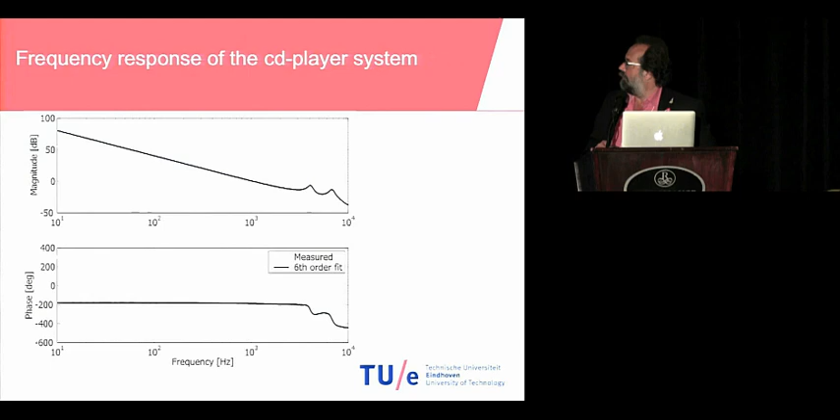Typically this is a frequency response of the radial tracking at that time. So you see a -2 slope, it's a mass, a force, no friction to the fixed world, no stiffness, so a -2 slope, the law of Newton. You see some resonances. So you apply a PID controller with an integral action and maybe some notches. If you apply H infinity, the outcome of the H infinity toolbox will also be a PID-like system with notches, of course.

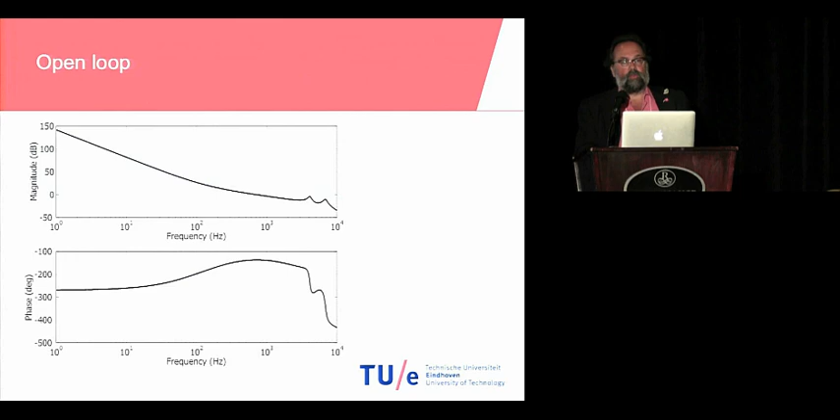Basically what it is, this is the periodic disturbance from the disk being eccentric, being a sort of a potato-shaped spiral on the micron level. You get higher harmonics. So the natural thing to do is to apply repetitive control. Now this was back in 1987 or so, and repetitive control already was invented in the 70s. There was a guy in Philips Research who implemented that in analog electronics.

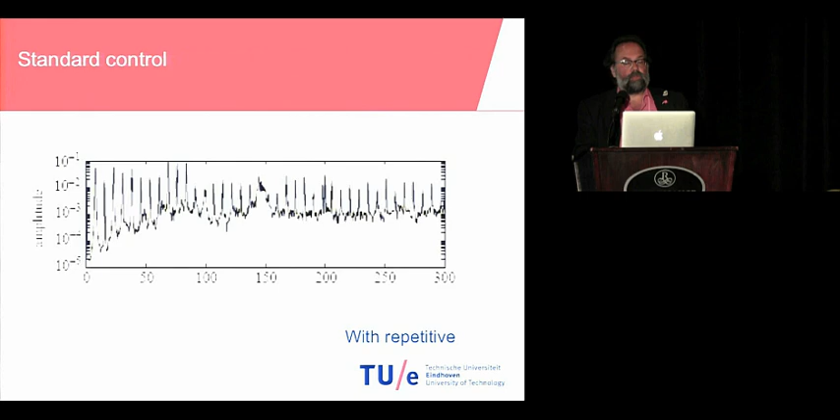What you also might see, but it's difficult to see, is that in between the periodic components you amplify, in fact, and that's the water-bed effect of Bode. Now in the frequency domain, this is the result. The bottom plot is including the repetitive controller. You get it almost for free, this performance. It leads to a much lower error.

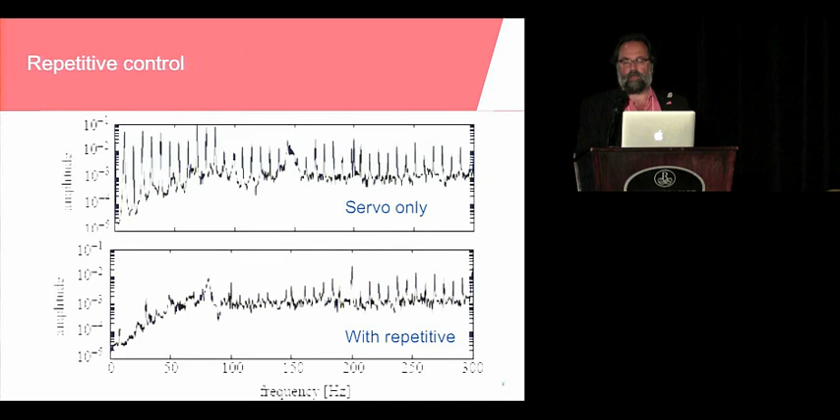The ball game I experienced, the ball game is all about Bode sensitivity. So I like this plot very much, the link to Gunter Stein's Bode lecture a long time ago. This is the ball game of servo engineers. You scrap away, you get performance at low frequencies, but you have to put the dirt somewhere and it's going to hit you.

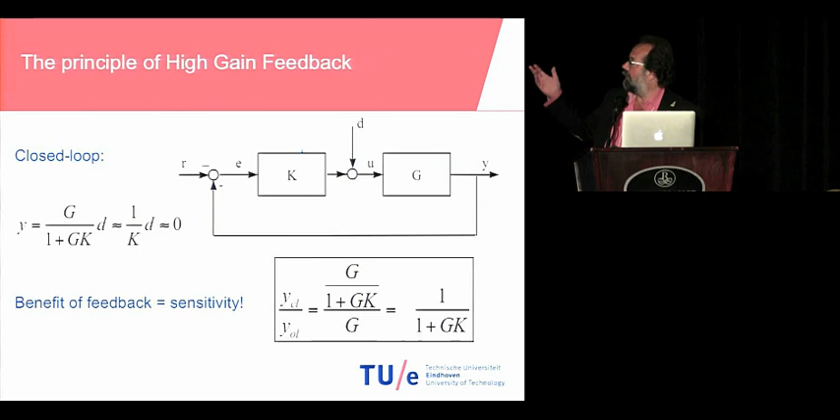The basic idea of our profession is high gain feedback. And I like to stress always this simple idea of high gain feedback. If you have a disturbance on a plant G, the open loop response is simply G times D. The closed loop response, from D to Y, is the process sensitivity G over 1 plus GK for SISO. And if the gain is high, K goes to infinite, then Y is going to 0.

And the benefit of feedback is the ratio between the closed loop behavior and the open loop behavior. So that's the process sensitivity divided by G, which is the sensitivity function again. So the sensitivity function is the key function for performance, as well as, by the way, for stability, because the peak value is the shortest distance to the -1 point. So the key thing of feedback is the sensitivity, but this is the problem of the sensitivity, right? You take dirt away somewhere, but you have to put it elsewhere.

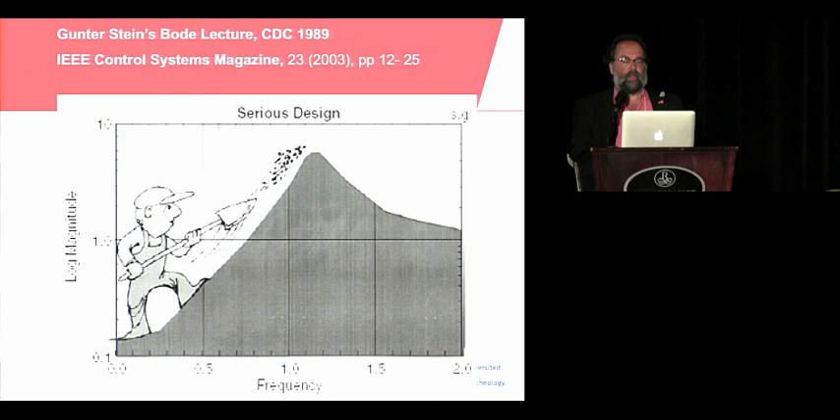So what we did at Philips Research at that time was to make a design cycle where you really use the knowledge of your disturbances into your design and loop shape of your controller. We were able to do the following in 7 minutes: measure a frequency response, fit a model, make new weighting functions based on the error spectra of the previous cycle, do mu synthesis, model reduction, implement, measure again, look at the error spectra, and do the cycle again.

This is one of the benefits of motion control. Experimentation is so cheap. You have a 10 kilohertz sampling rate normally, so in 1 second you have 10,000 data points. So this is great. And then you can really squeeze out Bode sensitivity. You can really make the spectrum of your error white. Because it's white, you can stop.

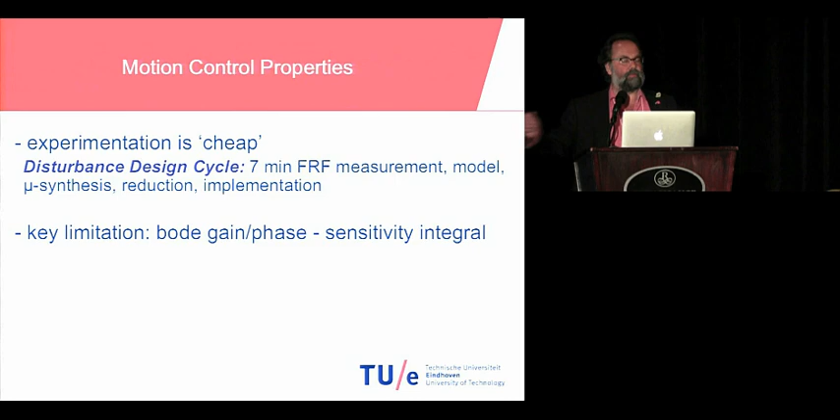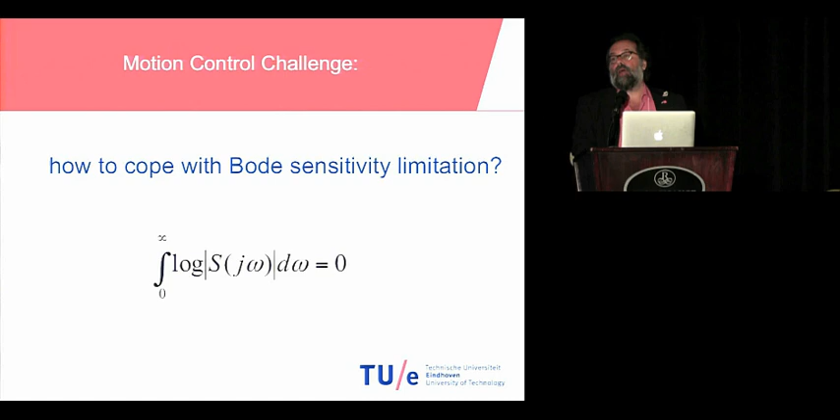So this was the thing I was working on every day: how to cope with Bode sensitivity, in fact how to circumvent it if possible. I will come back to that later on. Modern machinery can help, but it does not solve this limitation of performance.

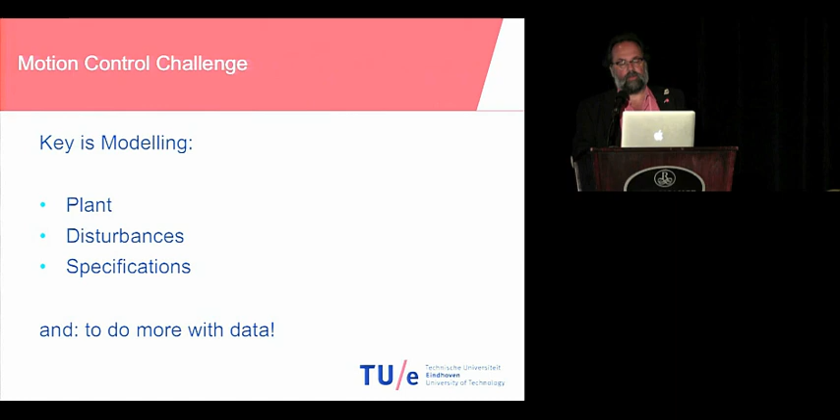So the key things I learned from my time at Philips: plant modeling, fine, everybody is focused on plant modeling, but disturbance modeling and specification modeling is as important as the other part. And do more with data, make a sort of data-based way of doing research and solutions.

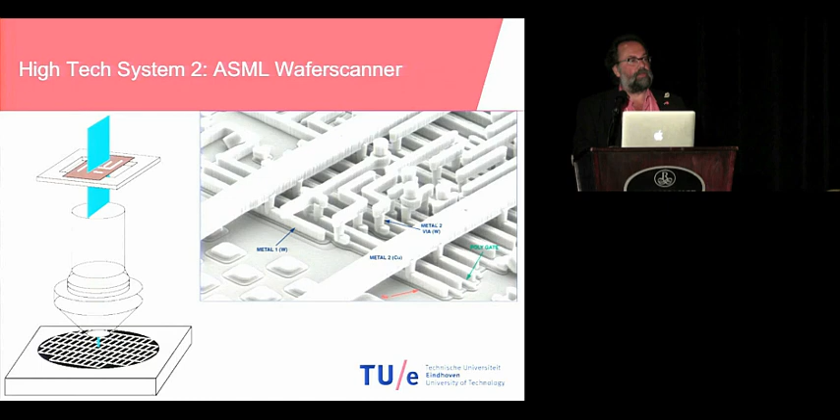So then I also started to work on wafer scanners for ASML. Wafer scanners are one of the most, well in fact the most brilliant motion system I know. So this is a short video - I will turn off this beautiful piano music - on how chips are being made.

So what you see here is silicon. They make a huge material pile of that. The diameter up to now is 12 inch, 300 millimeters, but the next phase will be 18 inch, 450 millimeters. This is the lithographic process step where you make the patterns on the wafer. And you will see a close-up now of how this actually works. So this is the scanning process of making this lithographic pattern on the wafer containing these dies to be.

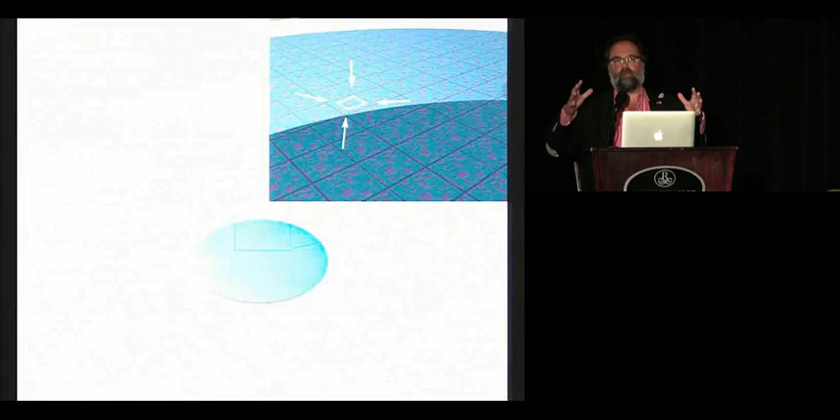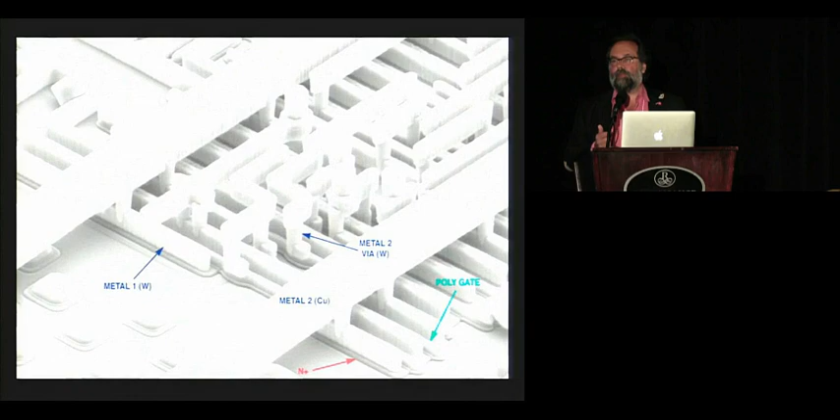This process is done at about 250 wafers per hour, approximately 4 wafers per minute. So that's 15 seconds per wafer, and you have to scan the whole wafer. Once done, you take out the wafer, do chemical processing, take away layers, put substrate on it, put it back into the machine and do another layer. This is repeated 20 to 40 times, and then you get a whole structure which becomes a chip. So 20 to 40 times the same wafer comes into the machine, and you can imagine, given the accuracy is about nanometers for making chips, that the accuracy of this machine is indeed incredible.

And indeed the specifications of these wafer scanners are nowadays immense. The accuracy should be better than, say, 2 nanometers servo error, while moving at high speeds and high accelerations.

So when this whole process started, going back to the 70s, people at Philips Research invented what they called the silicon repeater. It was basically an H-gantry style machine with 3 linear motors, Y1, Y2, X, and an air bearing. This was still for very small wafers.

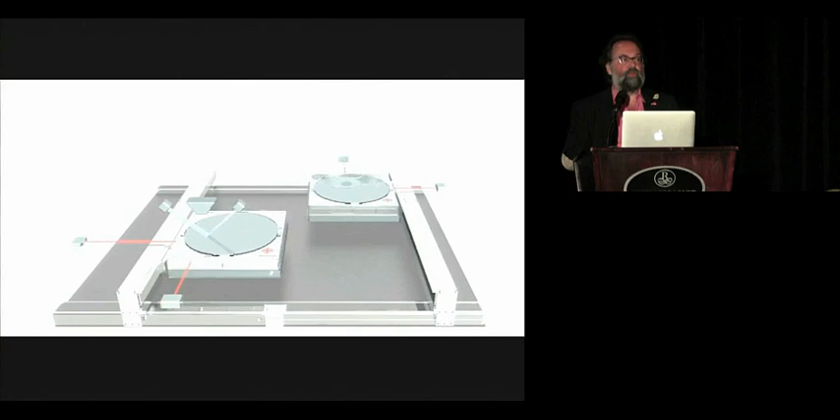The accuracies were microns. Then 10 or 20 years later, ASML machines are now being sold for 50 million euros, with stages of 100 kilo, moving with accelerations of 40 meters per second squared, 4 Gs, speeds of 1 meter per second, and accuracies of 2 nanometers. This can only be done because these stages are incredibly well designed - they don't have friction, they don't have hysteresis, they all use Lorentz force actuators to avoid contact. This is an incredible machine, and it pushes our technology of control engineering to the far end of what we can achieve.

So here's the lens - it's hard to see - and here's the wafer. This is a magnet plate; they move on a magnet plate. It's 6 degrees of freedom levitation, so no connection with the fixed world. There's a coarse stroke, and inside this box there is a short stroke, also 6 degrees of freedom. The magnets are put on the moving part of the short stroke, and the coils are on the coarse part of the short stroke, so that there's no mechanical connection with cabling.

So for one stage you already have about 12 inputs and outputs. Because the forces are so high, 40 meters per second squared times, say, 100 kilos, that's 4 kilonewton you have to apply to these machines. And the reaction forces are going to the outside world.

So the whole floor is vibrating, the machine next is vibrating, the metrology system is vibrating. So what we invented in Philips Research is to make a balancing mass. The base plate here with the magnets is moving as well, with the ratio of the masses, so the outside world does not feel any force anymore.

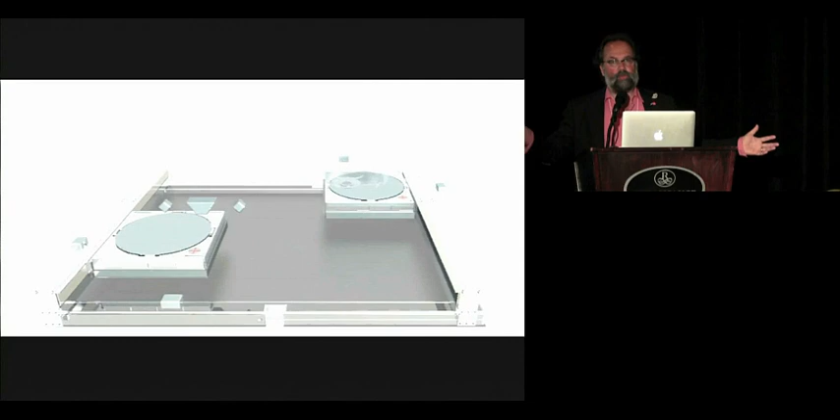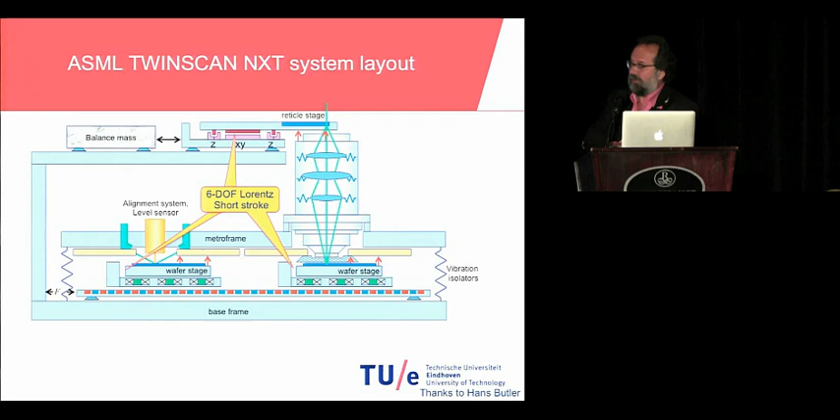The reticle stage has to move 4 times as fast because of the magnification of the lens, so 160 meters per second squared accelerations, with specs also in nanometers. So you have the planar long stroke, you have the drift motors for the balancing mass, of course. Planar encoders are used nowadays. There's immersion, so there's fluid to improve the numerical aperture, and this fluid also brings in disturbances. Yeah, so everything counts here.

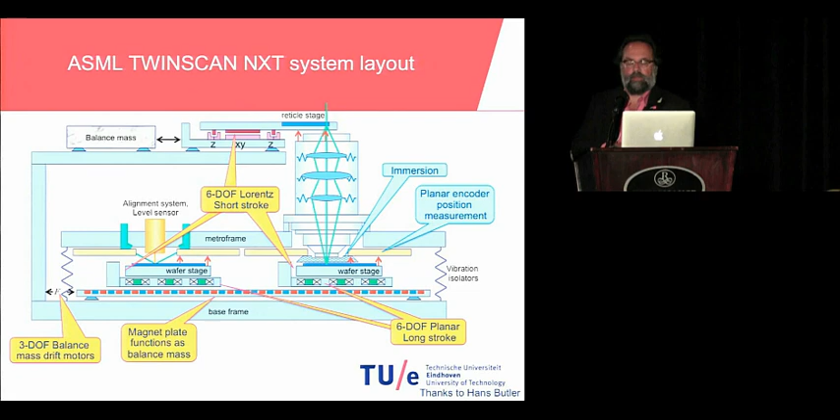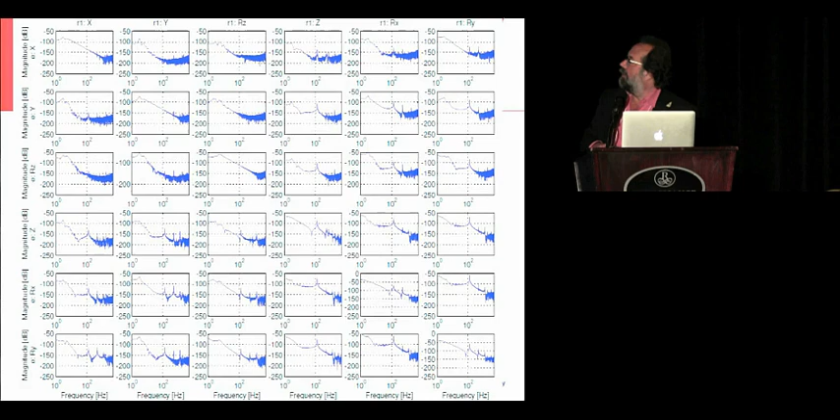So what's the challenge from a servo point of view? Well, this is a 6x6 frequency response measurement of such a stage. So what you can observe again is basically a -2 slope for the mass, no friction to the fixed world, and a lot of resonances.

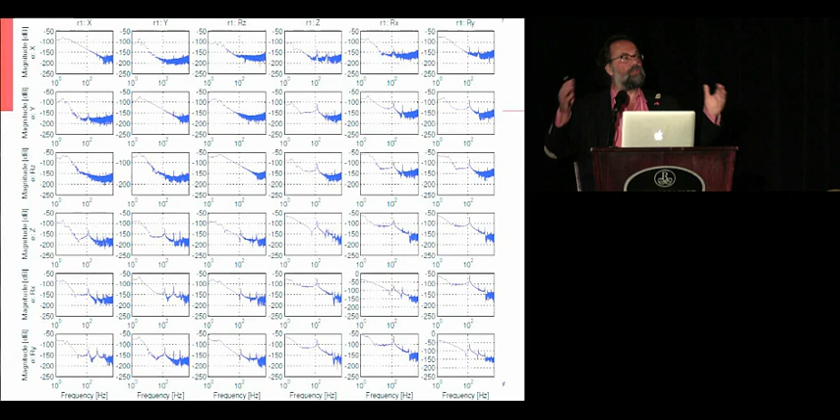Now the challenge is becoming, if we go from 12 inch to 18 inch, so from 300 millimeters to 450 millimeters, that these stages are becoming more and more heavy, and it's not possible to go on with this. So what we instead try to do is to reduce the mass of the stage, but if you do that, flexibilities come down because stiffness is lower. So we have to cope with flexible stages in the future, right?

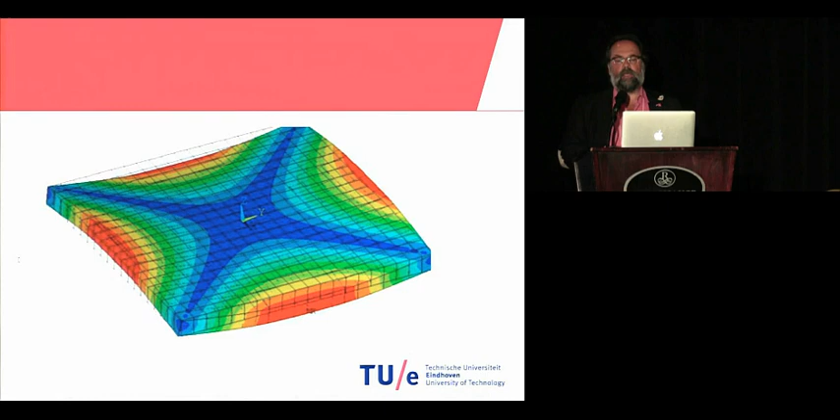And the way we do that is to think in a more elaborate way about controlling flexible systems, by adding actuators and sensors. So we have now a motion system with, say, 6 degrees of freedom, but we add actuators and sensors, say 8 inputs, 12 outputs, and then you have the freedom basically to modify or damp the flexibilities in your structure. So we go from just single input, single output decoupled systems, to systems where spatial dynamics are becoming relevant.

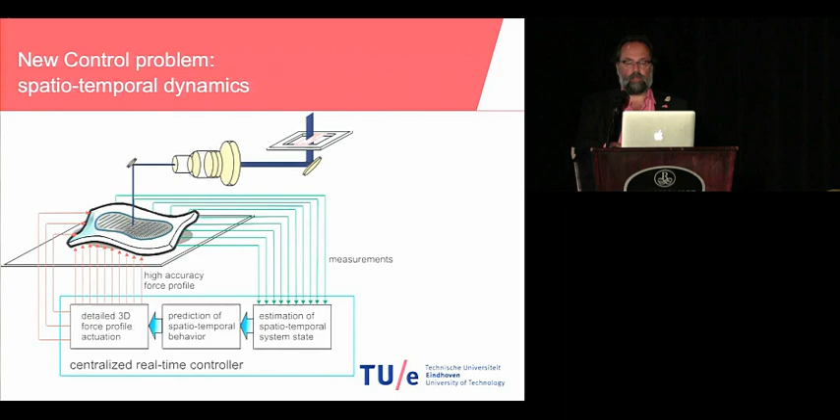Now for that we made, or ASML made, and we can use it, a test setup, a stage. You can see here the short stroke stage, 6 degrees of freedom, but we are free there to add additional actuators and sensors. The special thing, by the way, compared to vibration control, is that we do not add piezo actuators, say, to dampen vibrations. No, we sort of make the motion actuators more in number.

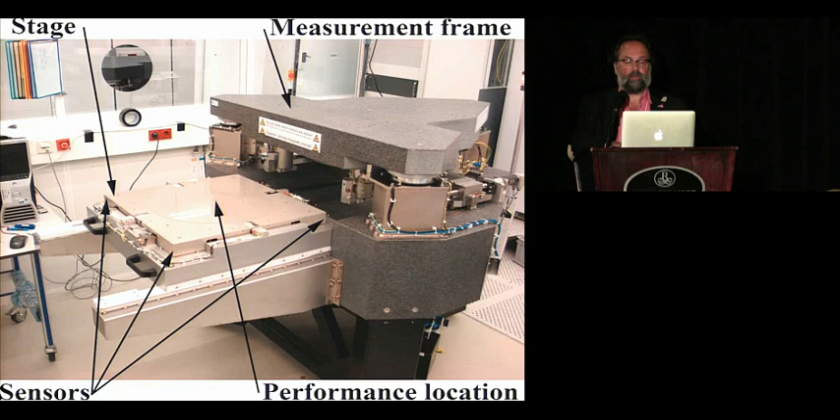So we have, say, 8 motion actuators doing a 6 DOF rigid body motion control problem, as well as a 2 DOF flexible mode reduction problem. So we sort of combine vibration control and motion control.

Now one of the things we do is basically manipulate those additional design freedoms, so playing around with matrices in the feedback loop to cancel certain modes out of what we see as a controller, so that we can more easily control certain loops here.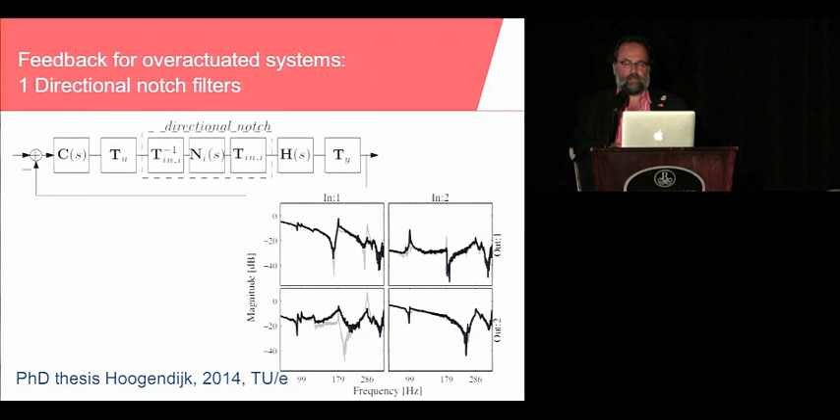Another thing we are doing is to really go to model-based control. But if you do model-based control, it all boils down to having a very good and accurate model. So we are now in a phase where we really want to push system ID techniques, control-oriented system identification, with the goal of applying robust control methods. So also the estimation of the uncertainty of the model is relevant.

This is the work of Tom Oomen, and a number of PhD students working on that now, and our test beds are the systems of ASML.

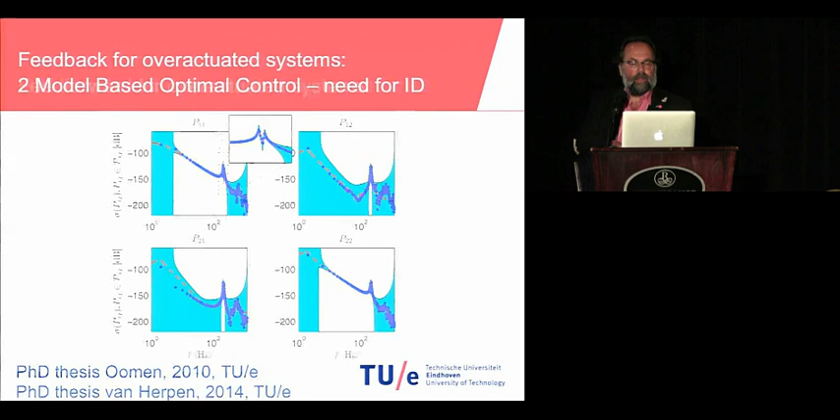Apart from feedback, the most performance of ASML wafer scanners, 99.99%, is being made by feedforward: acceleration feedforward, snap feedforward. With over-actuation, having more actuators and sensors than rigid body modes, we go into a new era of manipulating feedforwards.

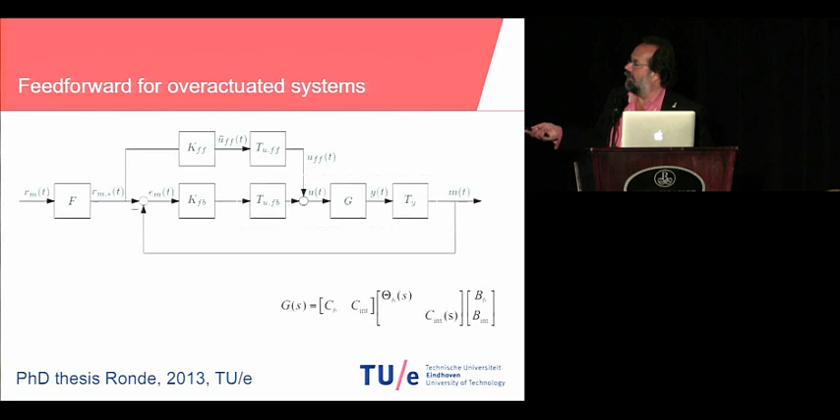One of the things we are researching, and that's the work of Michael Ronde, who will also give a talk this afternoon, is to find out what kind of interesting matrix you can put in a feedforward path so as to not excite certain modes with your feedforward, and to really explore the freedom you now have in your inputs, because the dimension of that is higher than that of your rigid body modes.

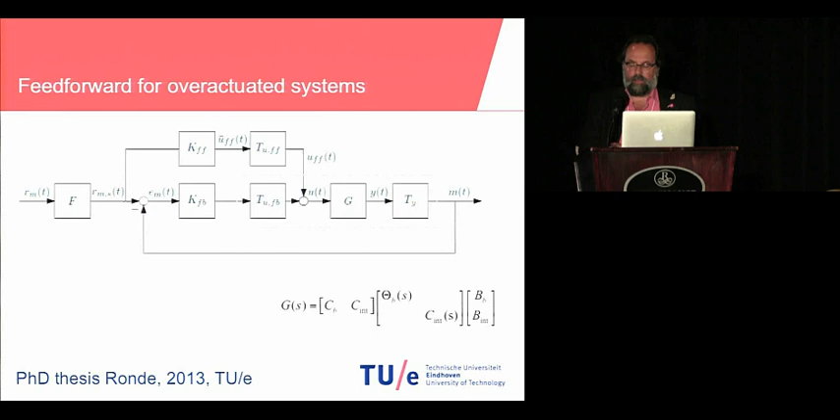So that's feedforward. We also work on using data, data-based things, because it's great to make models, but it's difficult, so maybe we shouldn't make models. So what we do here is to measure a frequency response. For lightly damped systems, there is some theory from complex function theory that you can expand the frequency response into the Laplace domain, so you can make a 3D Bode plot, so to speak, to reconstruct H of s for grid points of s in the Laplace domain.

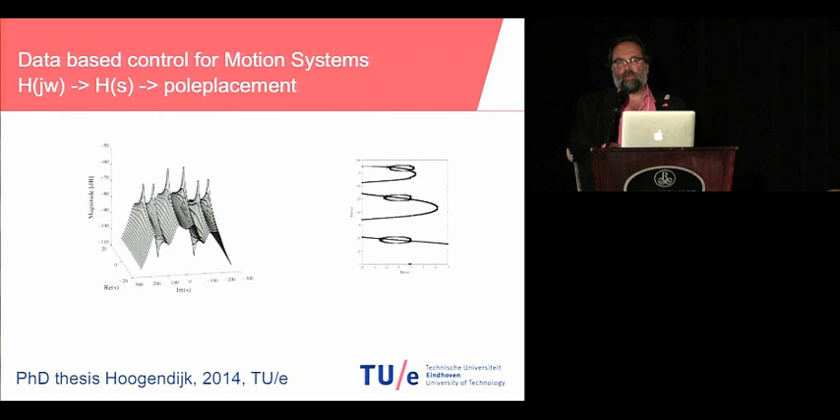Now this brings me to an idea I got within Philips Research, namely how to explore nonlinear things. The problem statement I put down: do there exist nonlinear feedback controllers that give a better performance for linear motion systems than linear solutions?

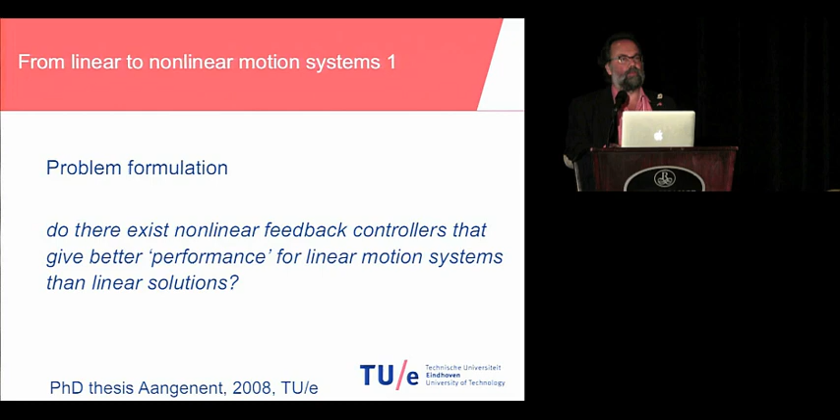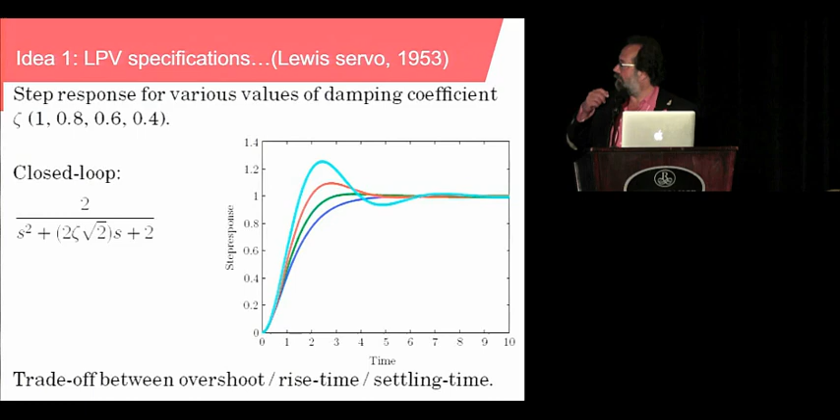Now obviously we all know this will not be true if your specs and disturbances are modeled in a standard framework of norm-based control. But for instance, this Lewis servo from 1953 is already a very nice example. For a second order system, normally we take the proportional and differential gains constant, so you get a second order denominator polynomial. The damping, of course, is crucial for your fast response, but then you have overshoot. If you have a slow response, high damping, you don't have overshoot.

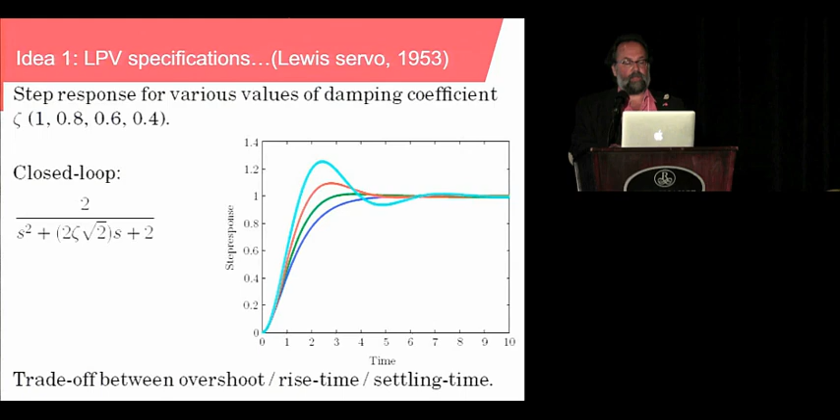Now if we can make the damping a function of the error, so if you have a large error you put low damping, if you have a small error you put high damping, in fact it's an LPV problem. You have LPV type of things in the specifications now, not in your plant, not in your disturbances. You can make a very nice response for such a system. It's an LPV application of the Lewis servo from 1953.

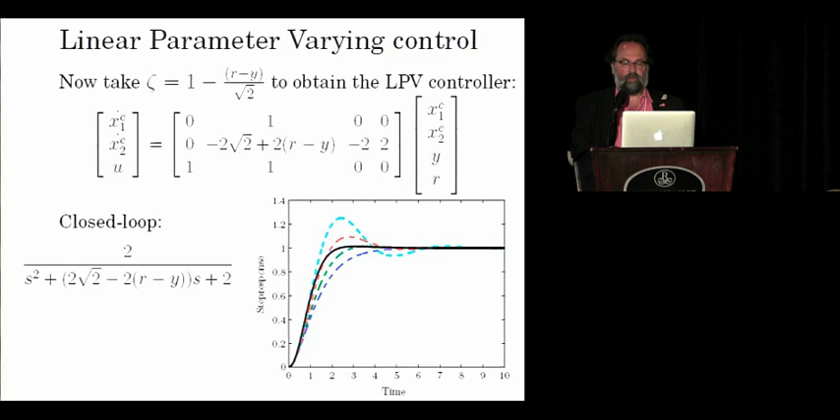The other idea is a span filter, I really like this idea, from 1966. This is sort of the dream of beating the Bode sensitivity. From the left side the error comes in. The top line, you rectify the error, you put it through a low pass. The bottom line, you have a sign function, so you throw away all magnitude information, you keep the phase information, you have a lead function. Then you multiply the two lines.

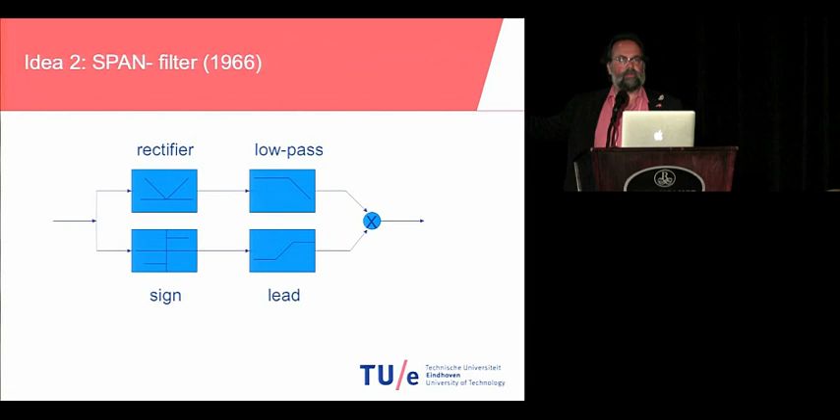What you hope to get is a low pass with phase lead. It works. This is the Bode plot of this nonlinear filter implemented and measured using a spectrum analyzer, the Bode plot of the span filter. In fact, it's the describing function because you generate a lot of higher harmonics. But we have a low pass and phase lead. This is the dream of every control engineer, right?

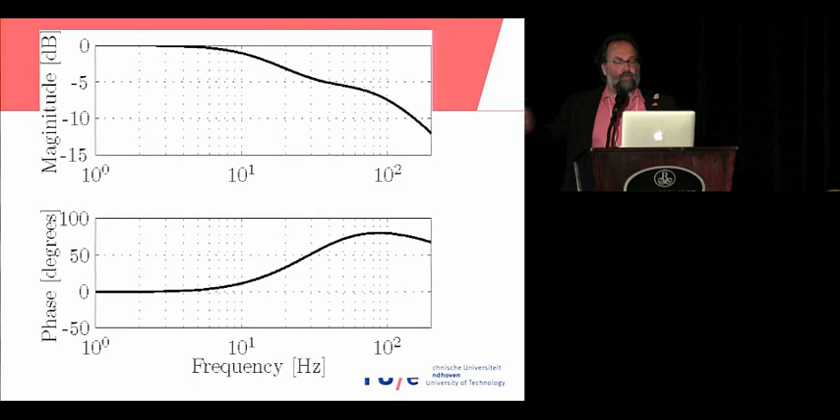Now, does it work in practice? We applied it to a fourth order system, a mass spring damper mass. The solid line is the span filter, the dashed line is a tuned PD controller. So it works. It works. Nobody uses it, but it works.

The key thing, of course, is if you have more noise, then the sign function blows up, you have higher harmonics, the whole thing goes down. So for specific disturbance conditions, this is really an interesting solution.

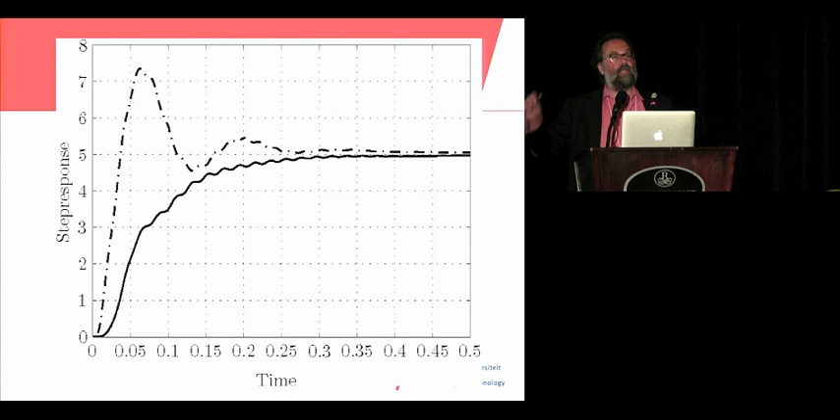Another question we made: can we use frequency response functions for nonlinear systems? We apply this for scanning electron microscopes. They suffer from friction, especially when they want to move really slow, nanometers per second, to scan samples. And you have stick-slip phenomena.

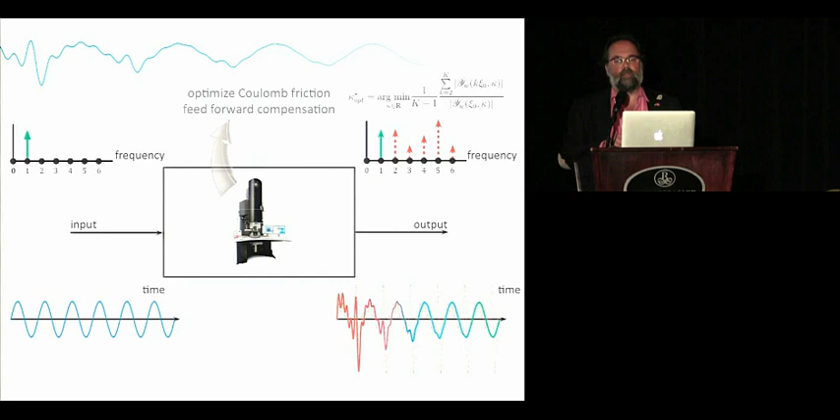What we did basically is we applied a sine as an input, and we took all the higher harmonics as output, and we tried to minimize that over the feed-forward friction compensation gain. So we tuned the friction feed-forward compensation so as to reduce all the higher harmonic content of the error. And that works really perfectly. So this is basically making use of nonlinear things, using frequency response functions and giving that back to the feed-forward tuning.

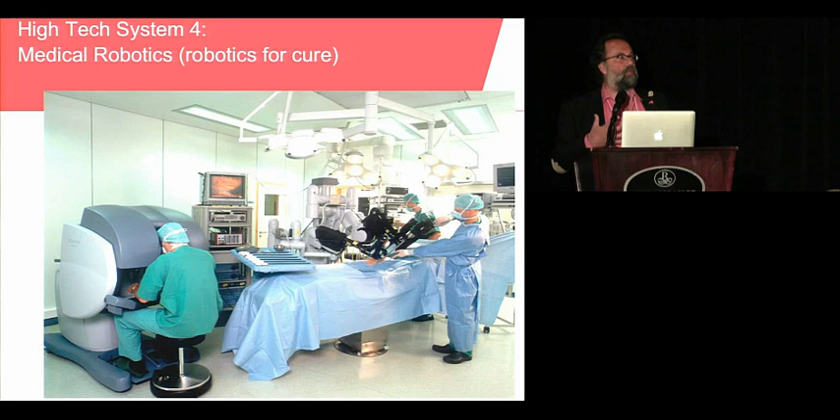Then I went to the university and started also to work on medical robotics, because I thought, well, we are so good in motion control, ASML, CD players, etc. So let's do a few things on medical robotics. You might know this picture, it's from Intuitive Surgical with the Da Vinci robot. But as a mechanical engineer looking at this, it's rather a large machine. And second problem is that the surgeon does not feel any force. So we started a project making our own Da Vinci-like robot for the same application, but much smaller, much more compact, much more stiff designed, including force sensors in the mechanism, so we could give haptics back to the surgeon.

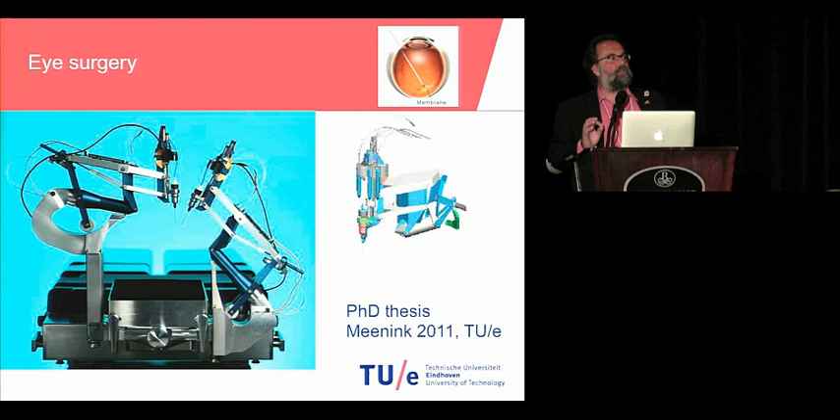We also worked on a new application for this type of robotics: that's the eye surgical robot we developed. This is for operations at the backside of the eye, the retina. Very precise operations, and for a surgeon sometimes too difficult to really manipulate the instruments. So we managed to really design such a robot, including again force sensors, haptic feedback.

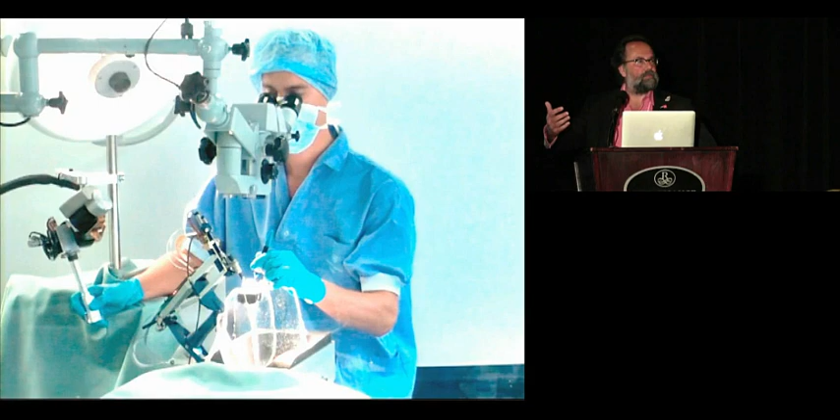Here you see how it works. In one hand the surgeon can manipulate the slave robot, and at the left side he can use his own instrument. Together with the two hands, he can make an operation. And with the slave robot, of course, you can scale motion. So we measured the accuracy at the tip of this robot, and we achieved better than 10 microns, which is not possible for the surgeon. You see here, he's shaking. This is because it's my PhD student and not a surgeon, because they do a better job, of course.

And then we also went to soccer playing robots.

World champion for the first time. We were four years on a row in the finals, and we lost from Germany, which was the worst loss we made, of course, and from China two times, and from Iran. But this year we won. Next week, by the way, in Eindhoven, we are organizing the World Championships of this year. About 2,600 people worldwide are participating and coming to Eindhoven next week in all leagues, humanoid leagues, mid-size, small size. Really interesting, it's really high tech.

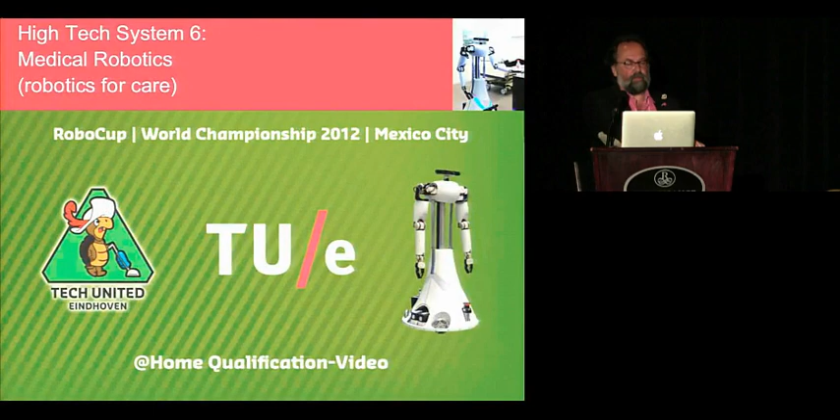And we also do that, of course, to prepare for the world which is coming up, where we have two less hands to help us if we are old. So we are developing care robots.

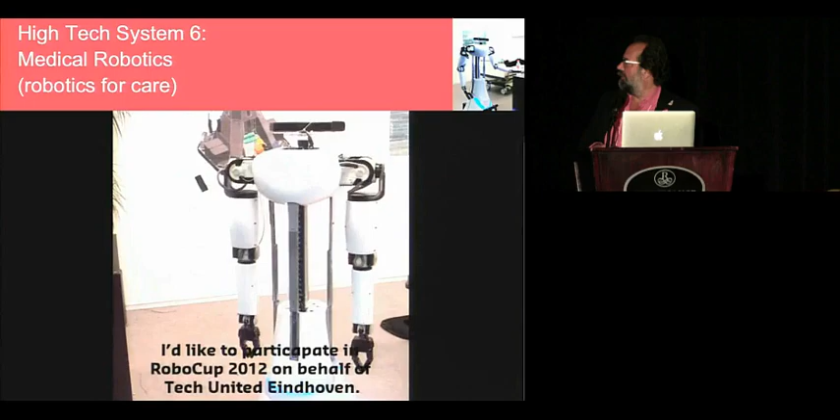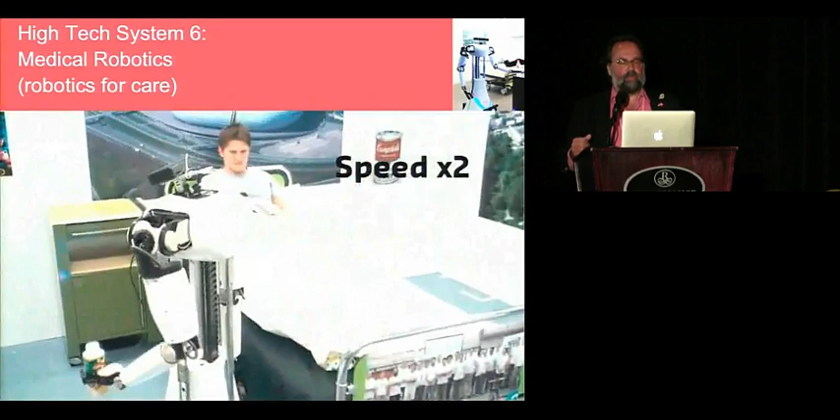This is an interesting development where we try to add intelligence to such systems so that they can manipulate things, understand people. So this is twice the speed. It's still going slow, I think. So we are not there yet.

This is our own hospital bed we have in our lab. They are also too expensive, these systems. So this is the great challenge, to make them really cheap, say 5K or so. This costs 100K. I mean, it's a prototype, but it's really a whole challenge to bring them down.

Now, another subject I'm working on with my group is cars. Cars are becoming robots. So what's the difference between a car and a robot, right? So autonomous driving, electrical driving, hybrids. We think that cars are going to solve the problems. Yeah, they are going to be so smart. In a modern Mercedes-Benz, there are 100 million lines of software code.

In a Boeing 787, there are 6 million. So cars are becoming so complex that they need us. There are a lot of control problems, a lot of communication problems, a lot of software issues. I sometimes call cars an iPad on wheels. And I did that already before Tesla, right?

Going back 100 years, this is the car of my great-grandfather. He was also doing things in cars. He wrote 3 books on cars. This is one of the covers of his book, presented in 1913. In the preface, he states that steam machines are over, electrical driving is sort of over. You know, most cars in those days were electric. And he wrote that the problem of electrical cars is the batteries are too heavy, the range is too small, and they are too expensive.

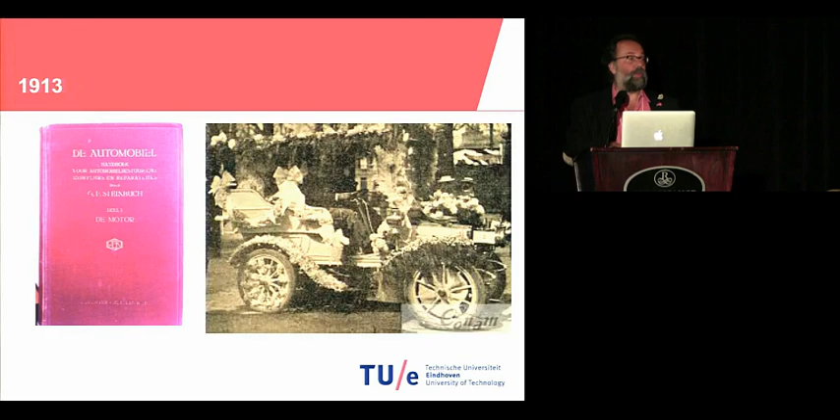But 100 years later, this is going to be my car. I will get it in August. That will be the first batch delivered in Europe. Dutch people are really happy with the Tesla. They ordered a lot, so I'm one of the happy people who can afford this also, and I'm going to get this Tesla. It's an amazing car, I call it a game changer, because the whole setup of the car is so different than all the other cars we know. I think it's going to show that electrical driving is feasible in due time.

It will take a long time before it actually goes into the larger market, but in all new technology there's a setup time, and we are at the start of that.

So we are doing in my group a lot of work on hybrid powertrains, on energy management for DAF trucks, for instance, but also for passenger cars. We also work on continuous variable transmissions and on electrical driving. We also work on smart cars, of course. We all know the things about connected cars.

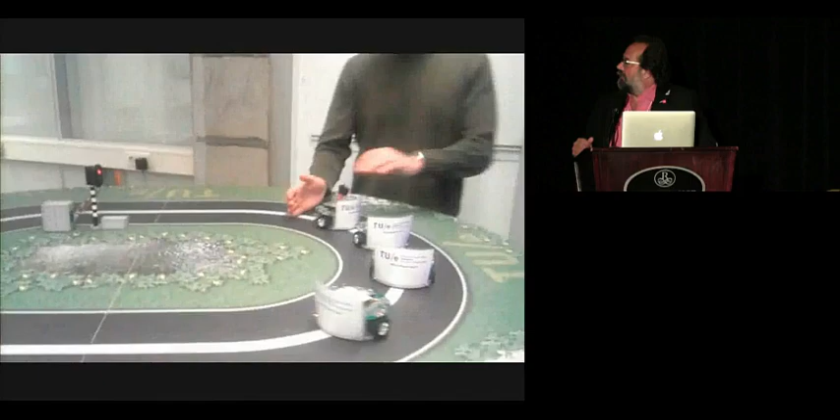You can in fact test a lot of the algorithms with robots. Here you can see a test with mobile robots. And if they simply look to each other with a simple LED device, you see that there is delay and that you get a traffic jam, basically. You see a squeezing of the road. So if you now apply wireless communication, so they can really say to each other, I'm now braking or accelerating, then you see they all stop together.

So this is of course already known for a long time. But actually we are doing tests now on the highway between Eindhoven and Helmond, where the automotive campus is located, testing these systems. I worked with a PhD student on this, proving string stability for heterogeneous platooning, etc.

Autonomous driving will be also a major change in the automotive industry the next decade or so. All major car companies are working on that now - Volvo in Europe and Audi as well. So this is our famous highway. We do a lot of tests there together with TNO, really nice.

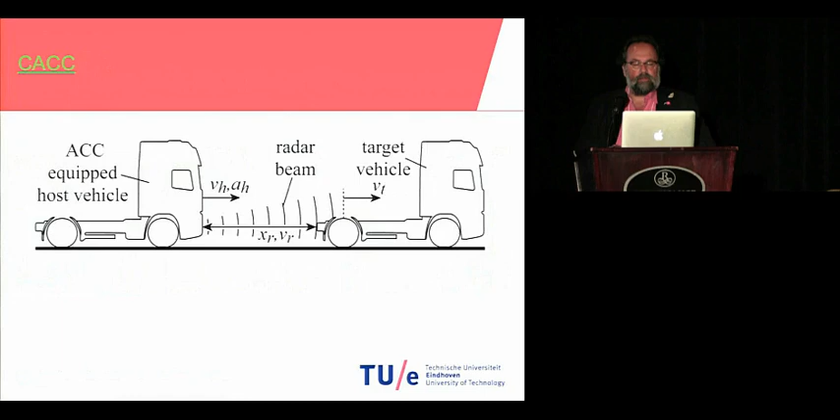I will skip this. So engines - they have had a huge development with respect to emissions and legislation. Now we are in Euro 6, so the top green part is now what is allowed in terms of particulate matter, soot and NOx. And in fact, the truck manufacturers, they now develop their Euro 6 and they now say emissions is no longer the problem. The key thing now will become fuel consumption, CO2.

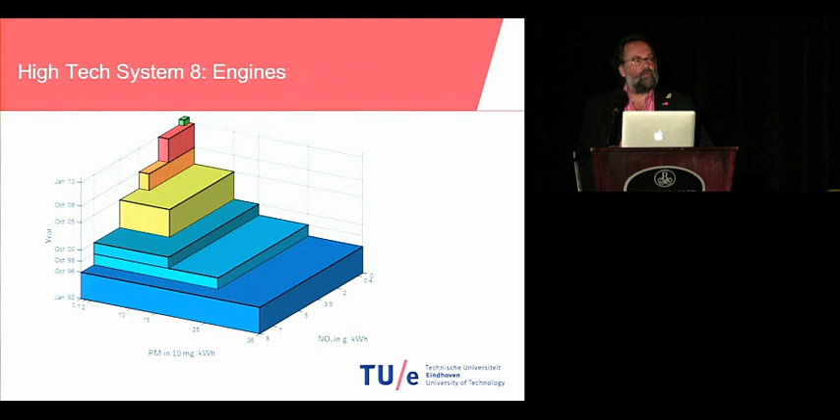And for that, there are a lot of developments in hybridization of trucks, but also waste heat recovery systems to get energy back from the exhaust heat. And by that we are making more complex systems. And with that, we really need a lot of control people who are able to oversee all the interactions and can do dynamic modeling and optimization. So there's a huge challenge for us, for our field, to work on that as well the coming years.

These are examples where we try to apply frequency response thinking, including getting a picture of how nonlinear our plant is, by using the tools of, for instance, Johan Schoukens from Brussels, in making the best linear approximation, but also quantitative measurement of how nonlinear our plant is.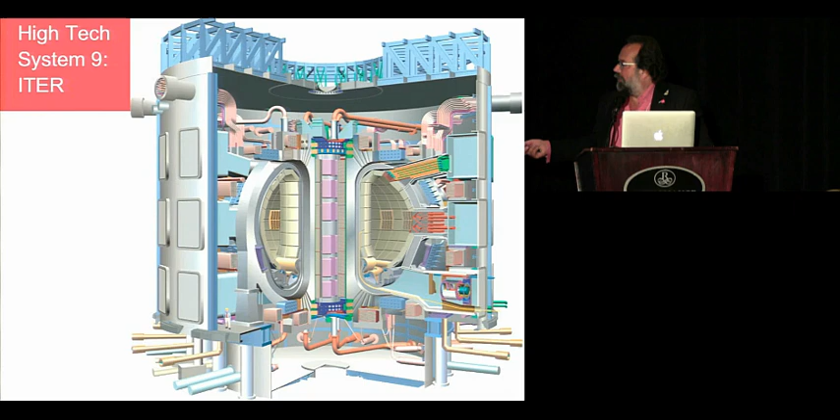I hope you can see it. This is a huge challenge. If it's going to work, it's great.

What is the key message with this project? Up to now, nuclear fusion is being done by people from physics and not people from control. Now they are building a huge thing, and they see, hey, we need control engineers. So what I liked most the last 6 years is this debate with the physics guys.

I have in my group a part-time professor from physics, and the first time he was talking about diagnostics, I said, what do you mean with diagnostics, man? What's that, diagnostics? It appears that they are the sensors. But for them, diagnostics is you record, you go to your computer, you think and analyze. People from physics, they analyze. People from control, they synthesize. And to do real-time things, you need real-time sensors. There were many more words we could not understand really in between.

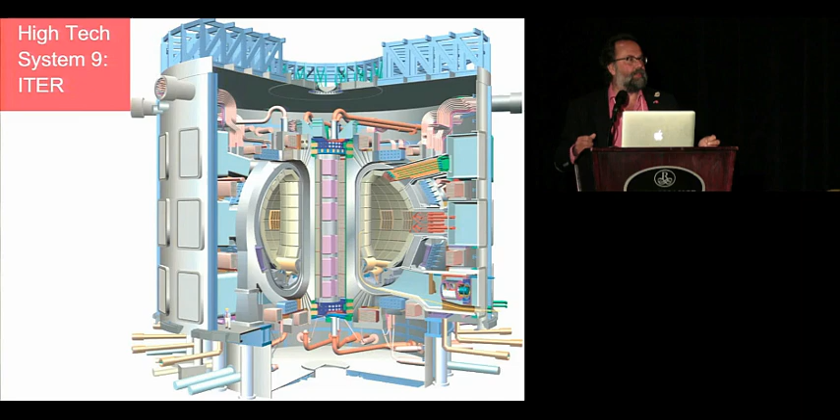But after 6 years, we really did a nice job. For instance, we were one of the first really doing inline control of magnetic islands. Here you see a magnetic island in the plasma. We could measure it and actuate it.

The first question I had when I started, also to the physics people, is: what's the process? The process the controller sees? They come up with a huge finite element program and I said no, what is the process the controller sees? It's simple, one input, one output, what does the controller see? They could not say that to me. So together we developed a control-oriented model.

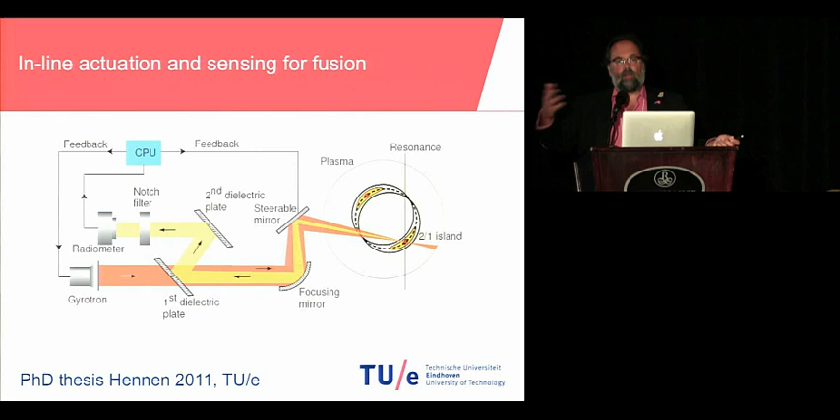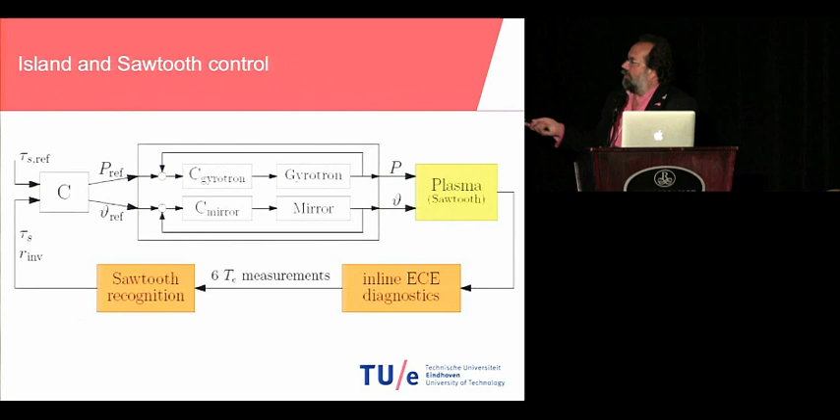You recognize all these things, of course, if you apply control in a field where control is not yet used that much. Basically, you use the mirror, where you can shine the beam into the plasma, and you use the power of the beam to modulate it.

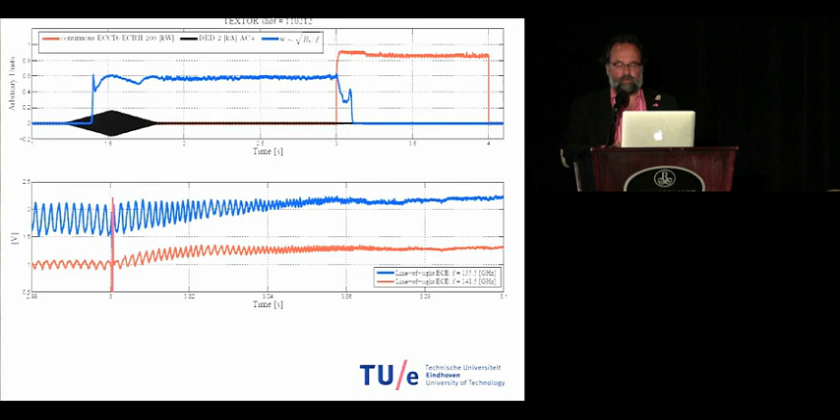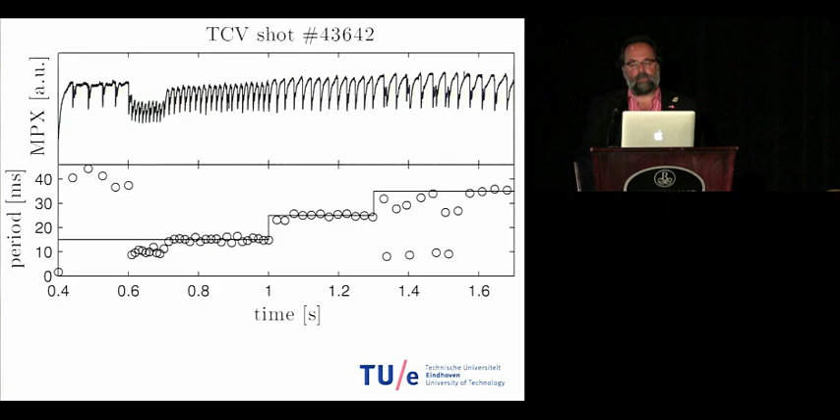So no feedback, just open loop injection locking. The last thing I like as an example is that we now also have a PhD student for nuclear fusion using vision in the loop. We learned all the things here from our soccer playing robots, and we apply that knowledge now for nuclear fusion. So we use cameras, optical cameras, to detect the edge of the plasma and to use that also real time for controlling the plasma. Quite nice as an application of vision.

So to conclude, for me, high-tech systems are drivers for advanced control. Modeling is key, also of disturbances and specs. Do more with data - we should love our experiments more than we sometimes seem to do. And my dream still is to beat Bode.

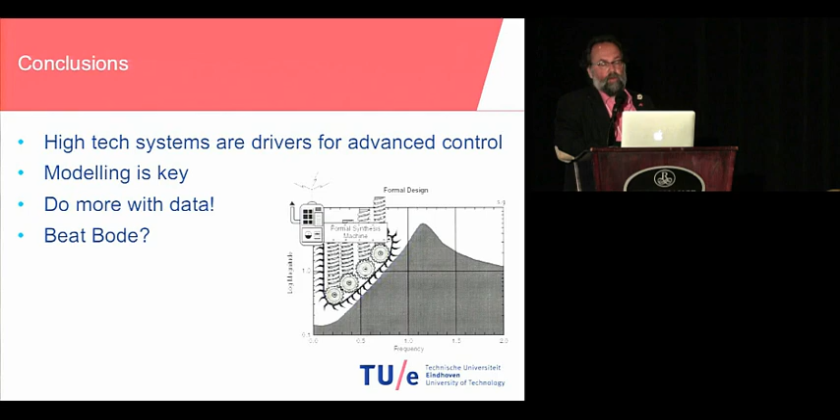Whoa! Whoa! Whoa! Whoa! There you go. Oh no, you go. Whoa! Oh... oh, shit. Oh no. Oh, what is that?

So the main message is you really should like your work. Thank you.